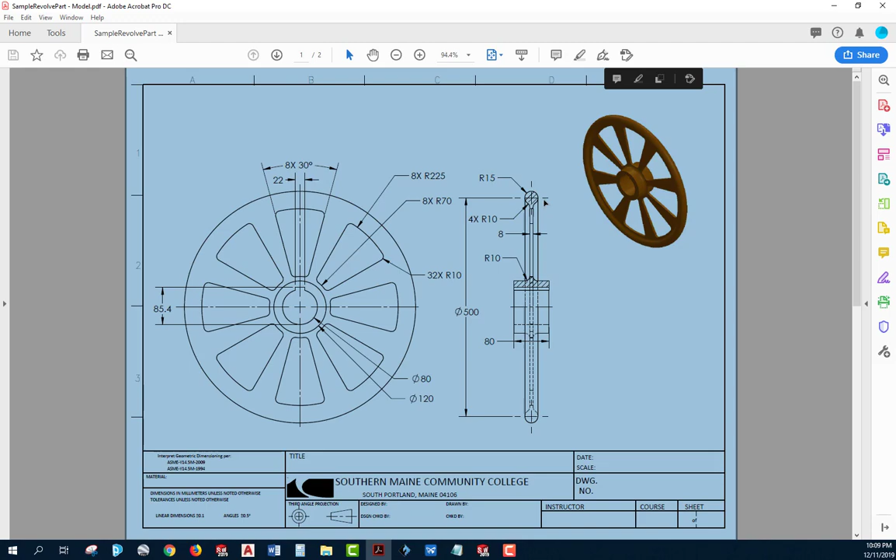What we're going to do first is to start by looking at this area right up here where you see the cross section of this hand wheel. I'm suggesting that you always draw the cross section of the entire wheel, put a center line that goes to the origin, and then do a revolve. So start a new part.

When you start the part, the first thing you're going to want to check to see is if you've got the right units. The units on the exam have always been millimeters, so if you look down here, MMGS is what you want to see. Just a caution, don't select MKS. You'll be drawing in meters, not millimeters.

I'm going to suggest that you start by sketching. I'm going to go in the right plane, put a couple of construction lines in, or center lines. I'm going to have one that goes right through the origin. Another one that goes up from the origin. I'm going to put a dimension on that. I'm drawing this so that I can put the end of this cross section right there.

So if I look, it's 500 millimeters from the center of that across to the other side. So I'll do a smart dimension from that point to the center line, drop down below, type in 500, and there's now my starting point. Get out a dimension, I'll go and draw a circle. I'll put the circle right at that point there. Dimension that immediately. Has a radius of 15. I'm just going to do a little math and make it 30.

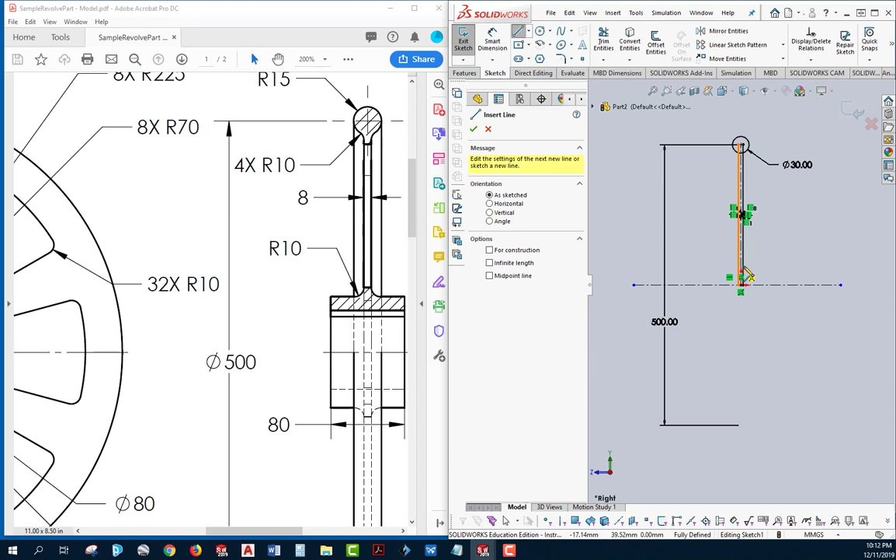Then I'll offset that center line bilaterally 4 millimeters because it's got an 8 millimeter distance, so 4 on each side. Make sure you select bidirectional. Looks like that. Now I'm going to draw the hub in. I'm going to draw the hub, this area right here, off of the center line by that distance here. So I'll just start a line, come out, come up, come back.

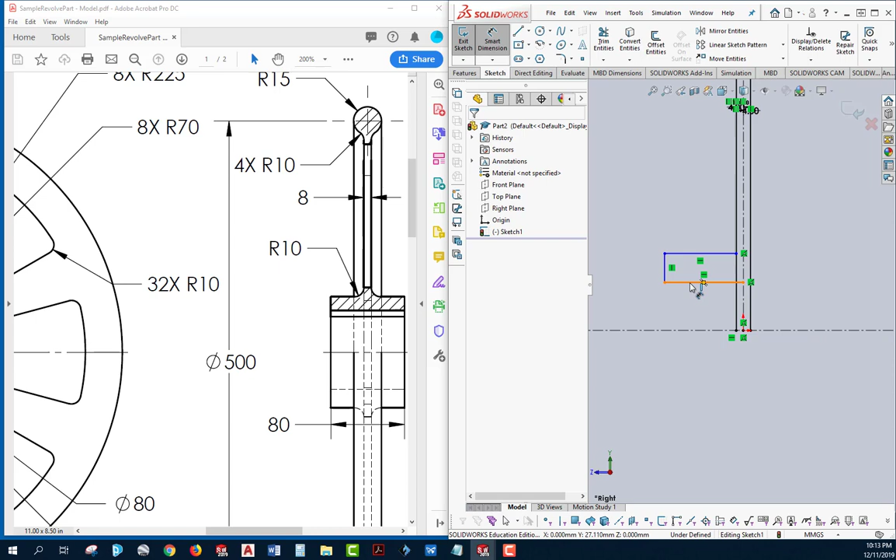Actually, I'm going to get rid of that coincident relation because I want this to come all the way over and actually hit the center line. So I want the end point of that to come over here. Now I'll put a few more dimensions in. Put a dimension from here to here. That's going to be the size of the hole, which is 80. Dimension right here, that's going to be the size of the hub, which is 120.

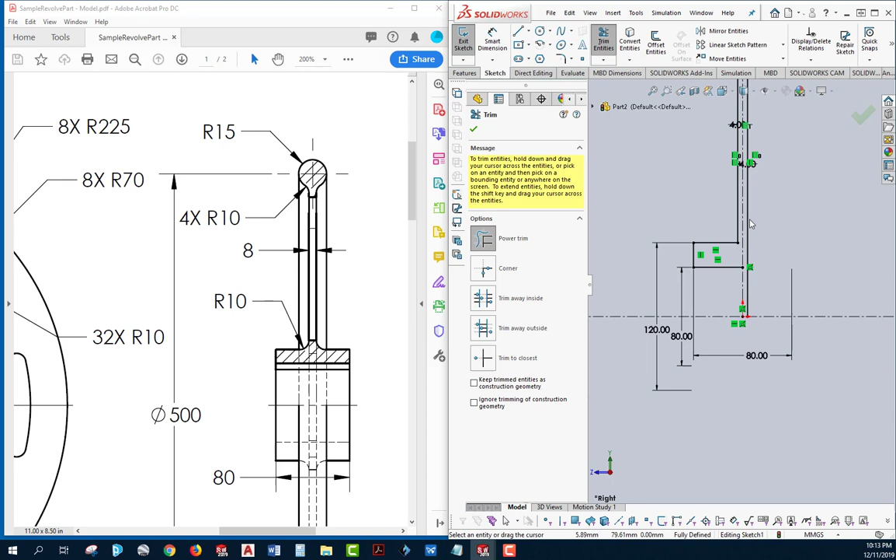And the width of the hub is given as 80, so I'm going to do a dimension from here to the center line, come across here and make that 80. Now I'm just going to go do a little bit of trimming. I'll get rid of this. I'll get rid of this. I'm actually going to get rid of this entire line because we're going to do a mirror. And then I'll get rid of that, this, and this. Now we'll mirror a few entities to the other side of the center line.

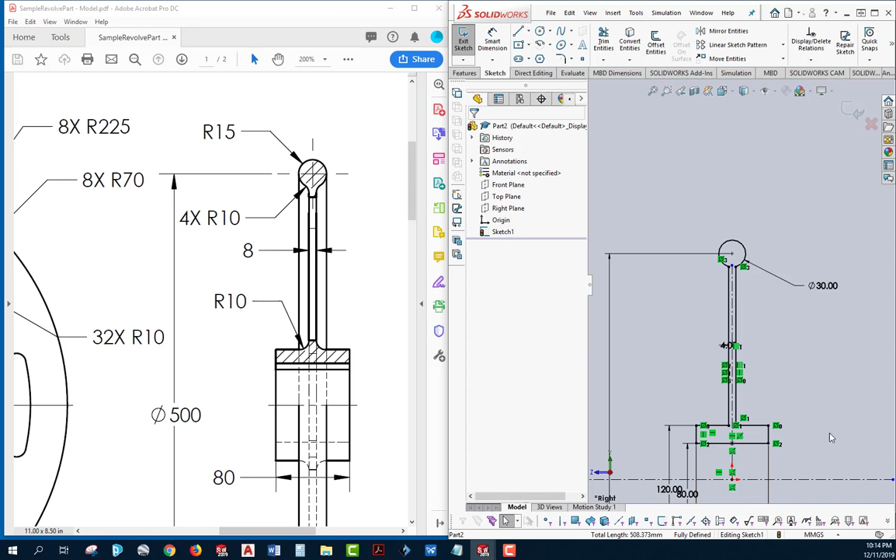Get those, mirror about, pick the center line, goes over the other side. Now I have a fully defined sketch. I could rotate this right now, or I could put the fillets in the sketch. I prefer to put the fillets in as a feature, so I'm just going to go over to Features, Revolve Base, select the center line. It'll give me the starting point for my wheel. I'd also recommend adding the fillets as the last thing that you do.

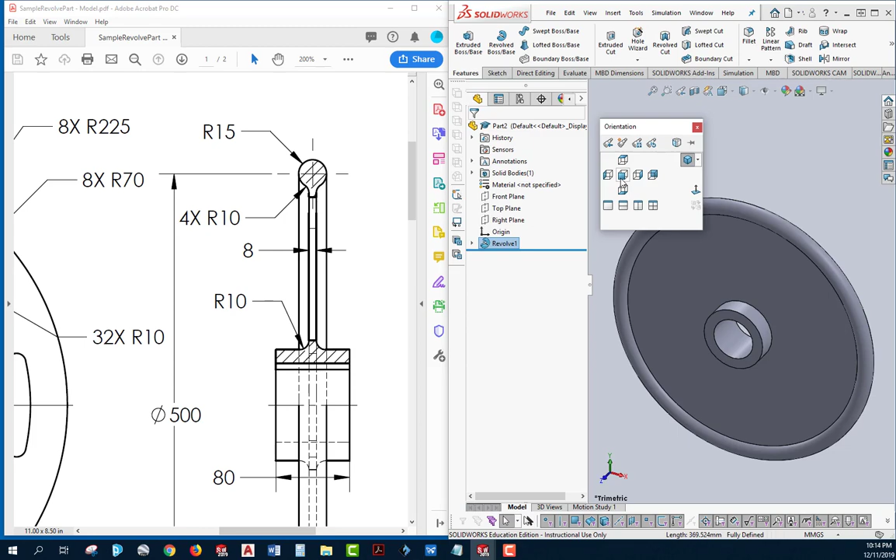So now we'll take a look at this right from the front, and we'll go over to the drawing, and I want to draw that shape right there. So I'll do another sketch. This sketch is going to be on that web. I'll draw a center line coming all the way up through. I'll draw a regular line that starts at the center and comes out here. I'm going to mirror that line around that center line.

Put an angular dimension between the two, and that angular dimension is going to be 30 degrees. And I'm going to draw a circle. One circle's coming out here. I'll draw another circle.

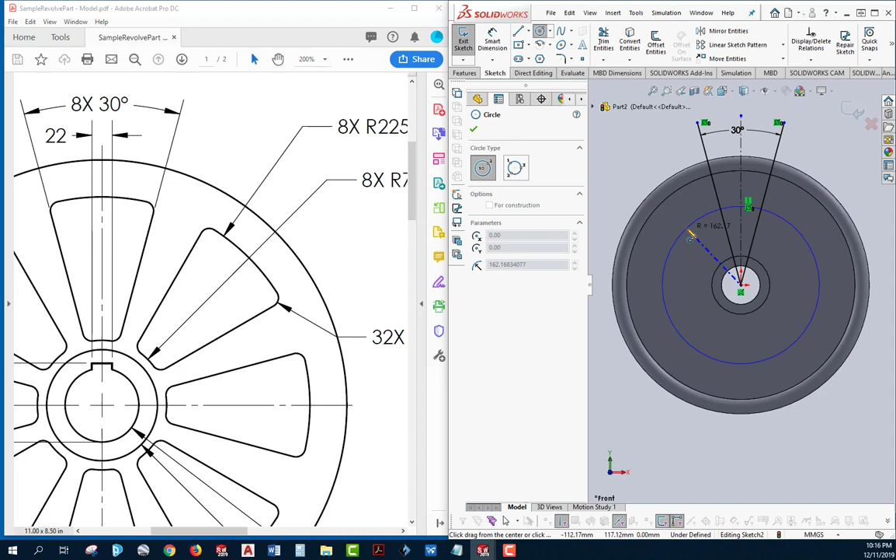Comes out to here. Come over and take a look at those dimensions. That's got a radius of 225, and this one has a radius of 70. So I'll put a dimension on this one. Make that 450. Put another dimension on this one and make that 140. Now I've got the shape I can use for a cut.

Now there are a couple of ways that I can do this. One is to trim out and have just the shape I want, but I could also use contours. I think in this case I'm going to use the trim function. So let's trim this and let's trim that and this and this. I'm going to trim that out. I'm going to trim this out.

Now what happened when I did the trim is that I lost my connection from the end of this line to the origin. So I'll hold the shift key down, pick that line, hold the shift key down, pick that line and the origin, make them coincident. Do the same thing with this one, shift key, origin, make them coincident. Now you notice it's still underdefined because now it is free to do that.

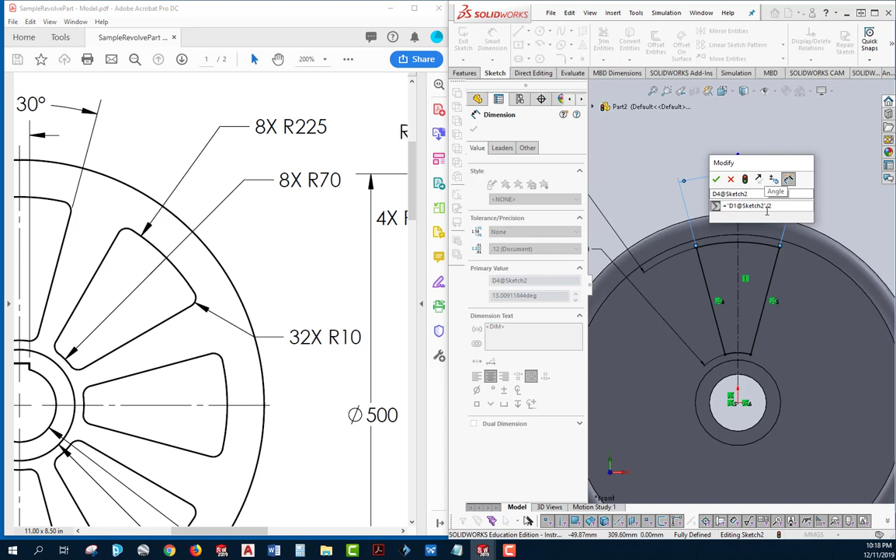We'll just go ahead and add a dimension from here to here, and I'll make the angle of that dimension equal to 30 divided by 2. I'm doing that instead of putting 15 in case I change to 30. So now we've got a fully defined sketch. We can go over to features, do an extruded cut. You know how I feel about doing a cut up to surface, so that's what I'm going to do here. Come back out. There's our feature.

Now we'll take a look at it from the front again. Now before we do the array, which is what we're going to do next, what I'd like to do is put those fillets in, because if you take a look, all of those pockets, all of those openings have fillets. So we'll tip this up, go to fillet, grab that edge right there, and the fillets have a radius of 10. Put a 10 in on this side.

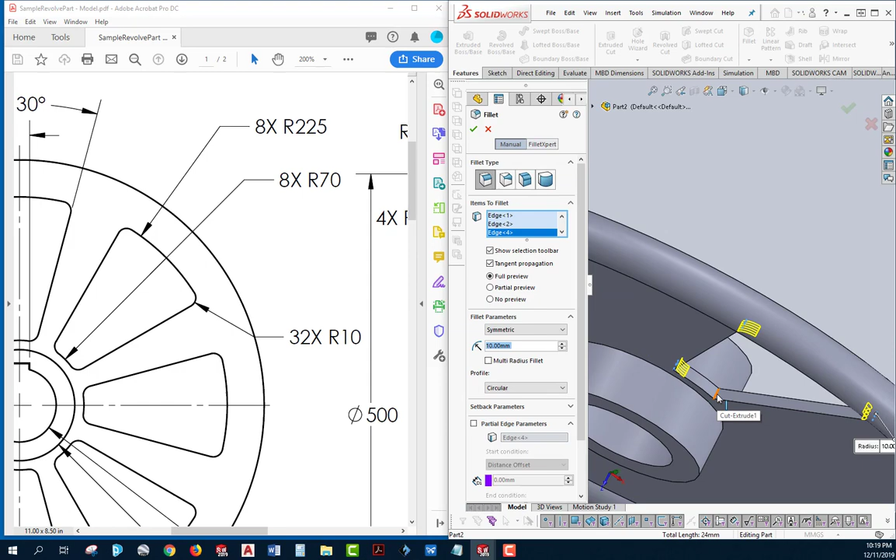Oops, I don't want that face, I want that edge. Do the same thing here, not that face, that edge, and then get this edge. Now I've got that opening exactly the way I want it. So now what I'm going to do is go over to linear pattern, drop down and pick circular. It asks for direction. I'm just going to pick the face of that cylinder.

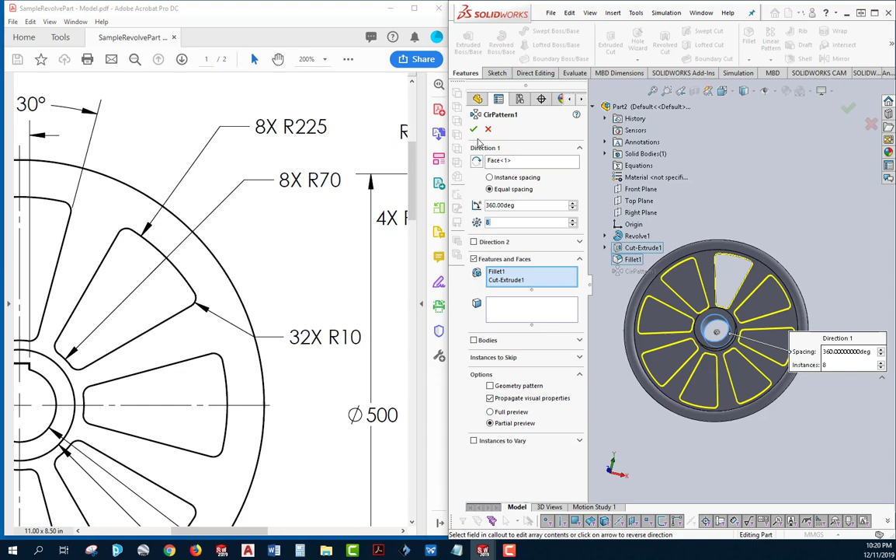What was already highlighted was the last fillet that I put in, but I also want to add the cut itself. Come back up here. Did I get lucky on that? How many of them are there? 8. I did get lucky on that. Did I? Nope, there's 10. There it is. That's 8. Nice to know that I can count to 8.

Then we've got a couple other fillets to put in here, so we'll go ahead and add those fillets. So I have a fillet right on that edge all the way around. Another one right on that edge all the way around. Turn around and do this. Come up here and do that. Okay, almost done. Now we'll go ahead and look at this right from the front. Looks like this. I need to put that keyway in.

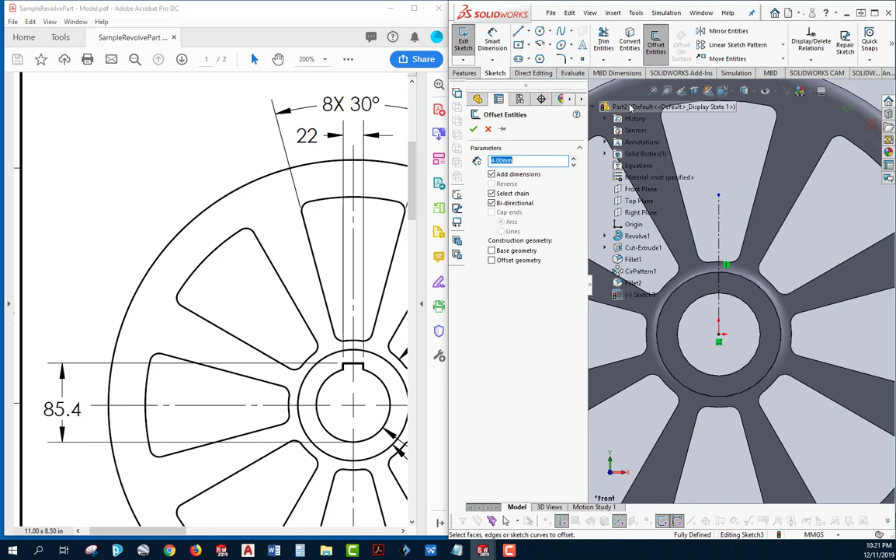Go over to the drawing. The depth of the keyway is 85.4 and the width of the keyway is 22. It's given right there. So we'll do a sketch on the face of the hub. Once again, I'm starting with a center line. Bring it right up through here like that. Let's start by offsetting that 11. Pick the line, 2 different directions. That looks good.

Now we need to have a line that goes across here, it goes to here. Come in and do some trimming. We'll get rid of that and get rid of this. I'm going to do a convert entities on that edge right there. Now we'll do some more trimming. Get rid of the rest of this and get rid of that. So now I've got that shape.

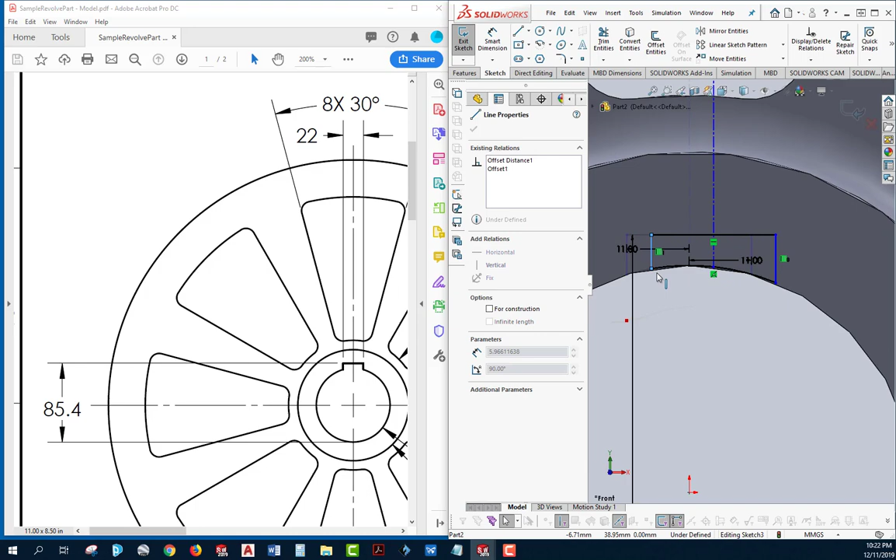All I need to do now is put the dimension giving the depth from here. Hold the shift key down and pick that. 85.4. And we need to figure out why it's not yet fully defined. Probably I trimmed something out that I needed. Yeah. That's no longer lined up because I trimmed that out too. I went a little too far on that.

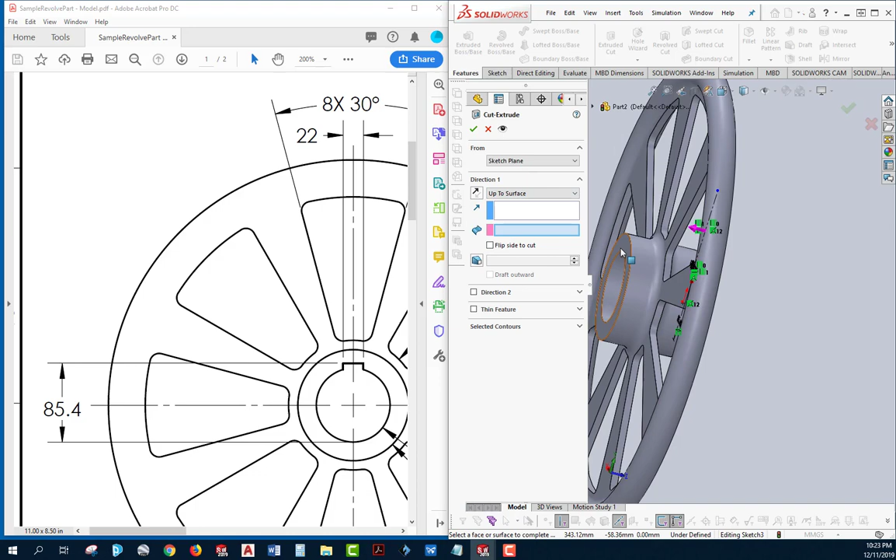That's alright. I'm going to pick the origin, hold the control key down, pick that line, make them coincident. Now it's fully defined. We can go up here and do an extruded cut. And I'm going to go up to surface. And that surface I'm going to go to is right there. It looks like that. So you can check to see if you got the same mass I did.

I'll go here and assign a material. Let's just make it plain carbon steel. Go into mass properties. When you go into mass properties, what I got for mass was 16,964.35 grams.